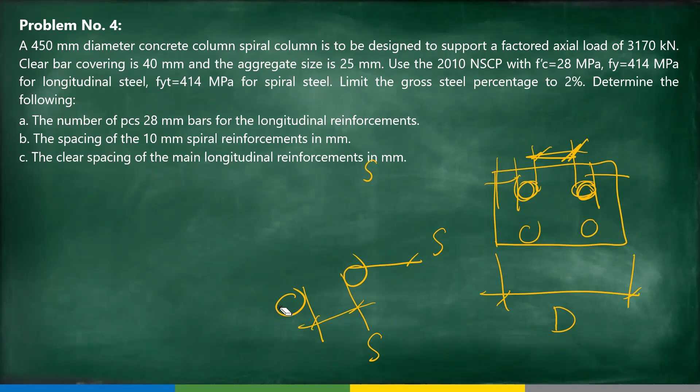Paano naman natin masosolve yung spacing kapag spiral column? Doon naman tayo medyo mahihirapan. Pero let's try to solve that. Dito muna tayo sa letter A, the number of pieces of 28 mm bars for longitudinal reinforcements. So given yung rho G natin, 0.02, and meron tayong 450 diameter ng column. Sabi natin kanina, rho G ay equivalent to As over Ag. So pwede na natin kaagad ma-solve yung As at malaman kung ilan yung gagamitin nating 28 mm bars.

As, rho G natin ngayon, which is equivalent to 0.02 multiplied by Ag, yung ating concrete column spiral, 450 mm diameter. So pi over 4, 450 squared. So therefore, As will now be equivalent to 3180.8627 mm squared. Tama ba ito guys? Okay, so tama yung ating As.

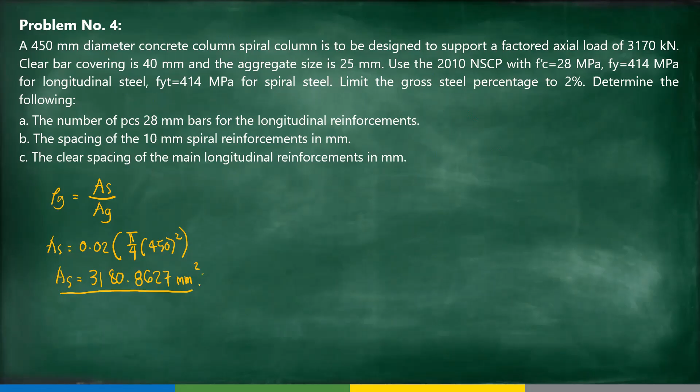Nakuha na natin yung total area na kailangan natin for steel. So ang tanong dito is kung ilang piraso, gamit ang 28 mm bar. Number of pieces is equivalent to As over Ab. As is the total steel area and Ab is the area of our steel reinforcement. So 3180.8627 divided by pi over 4, 28 squared, equivalent to 5.16. Hindi natin pwedeng sabihin na 5 pieces kasi kukulangin tayo ng 0.16. So dapat gawin nating 6 pieces. And this is now our answer.

Next, for our letter B, the spacing of the 10 mm spiral. Paano natin ngayon makukuha yung spacing ng ating spiral? Yung formula natin kanina, ito.

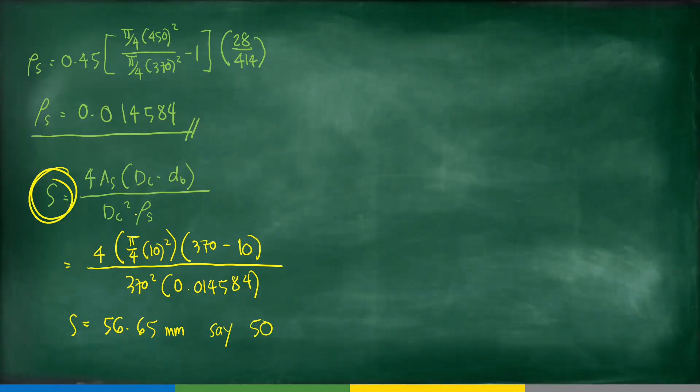So kung ang ginamit natin dito ay minimum yung rho S natin, therefore, ang nasosolve pala natin dito ay maximum. So ibig sabihin pala, yung 56.65 mm ay yung maximum na nasolve natin for spacing. So hindi na tayo pwedeng lumampas dyan. Pwede nyong sabihin na 50 mm or 55 something. It is up to you kung paano kayo mamili. Let's say 50 mm yung napili natin. Hindi pa natin to pwedeng i-box kasi meron pa tayong dapat i-check, yung minimum and maximum S.

Sabi natin kanina, spirals shall consist of evenly spaced continuous bar or wire with clear spacing of at least the greater of 25 mm and 4/3 of our aggregates. So ibig sabihin pala, yung minimum na ating spacing should be 25 mm or 4/3 ng ating aggregates, and dapat hindi na siya lalampas ng ating 75 mm. Then meron pa tayo kaninang maximum dito, yung DC over 6. So let's check that ngayon.

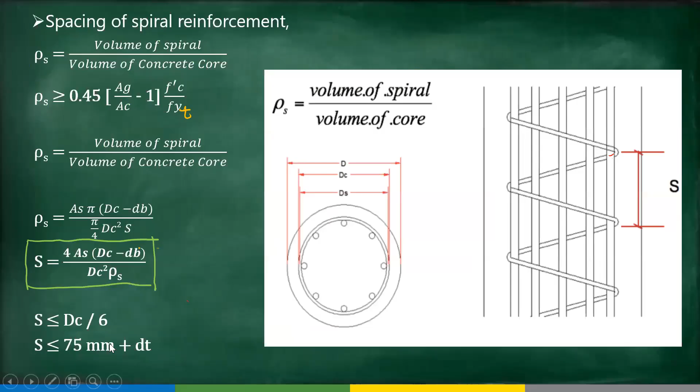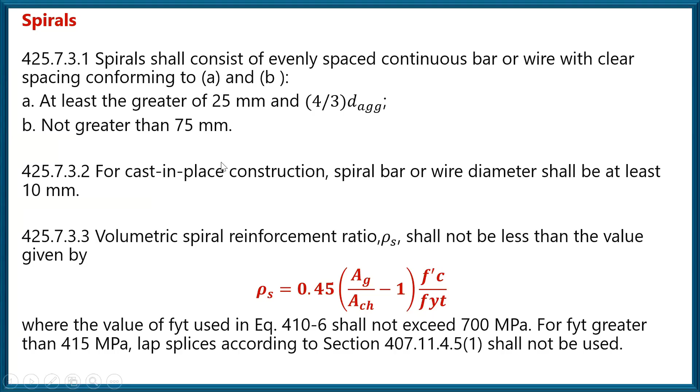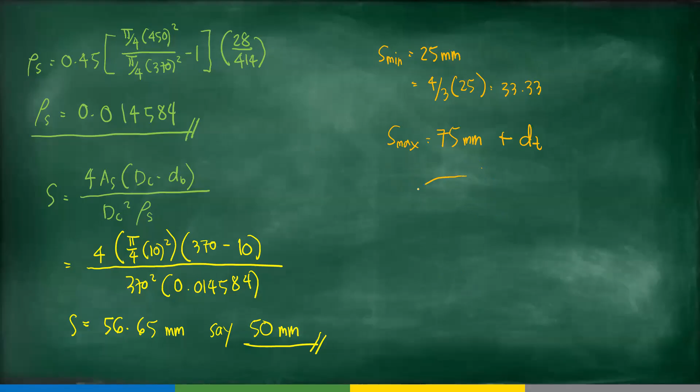Next, check for S max. Yun ay 75 mm plus DT. Ito, not greater than 75 mm. So bakit 75 mm lang ito? Ganito yung ibig niyang sabihin. Di ba yung spacing natin for spiral ay ganito? Guys, sana naiintindihan nyo naman yung sulat ko, yung drawing ko. Ito yung ating spiral.

Bakit sinabi nating 75 mm plus DT? Kasi yung 75 mm is measured clear to clear lang siya, I mean edge to edge. Yan daw yung maximum. Ang kailangan nating spacing is center to center. Ito yung maximum natin, 75 mm, and ito naman yung diameter ng ating ties, yan yung DT. Basta dito, yung DB na ginagamit dito is DT. Huwag kayong mali dito, please. Ang kailangan natin is yung measurement center to center.

So paano natin ngayon makukuha yung S max? That is 75 plus half ng DT plus half naman dito. So parang iisa lang din guys. Kaya ito ngayon yung ating S max. So this is equivalent to 75 plus diameter of ties, 10. This is equivalent to 85 mm. So yung maximum natin ay 85.